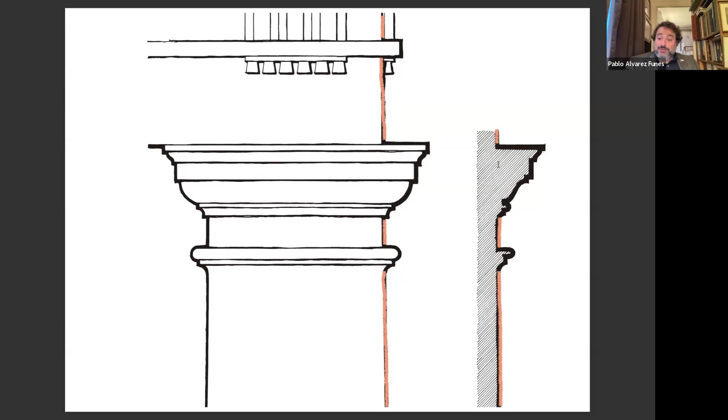That's a must in classical architecture. It happens in Gothic, it happens in every type of architecture. The neck, which is the diameter just below the capital, is the element sustaining most of the weight, transmitting the weight to the ground, and therefore everything needs to be aligned with it. There is only one notable exception where you can skip this idea, and we're going to see it.

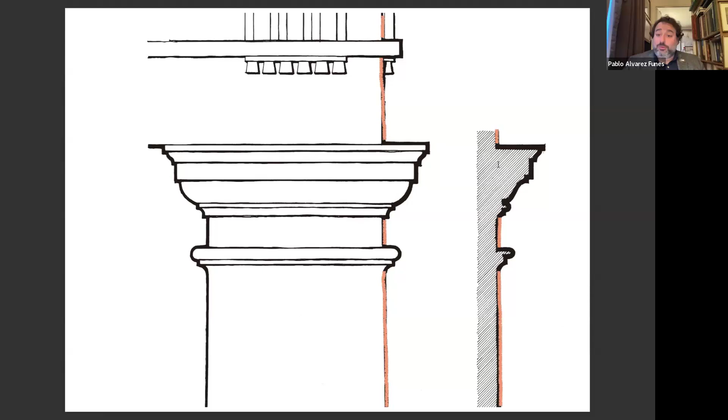On that regard, you can very clearly see two examples of moldings of two different porticos, and you can clearly see that the one on the right has been nicely done, aligned with everything that needs to be aligned, while the one to the left has something odd. If you don't see anything odd, I am telling you that this is not the way you do things in classical architecture, nor in traditional architecture by extension.

This is not a matter of my preference, or a Western preference, or 'that's what the classical say, the Gothic do something else.' No. All the loads are transmitted to the pillar, and then if necessary we have cantilever elements, we have brackets, we have things, but the slab doesn't project outside the lines of the upper necks.

You can see very clearly that while the structure on the right looks light, despite being bigger, despite being a much bigger entablature, the structure on the left looks heavy and clumsy. This is because of the wrong placement of the entablature.

Together with that comes the position of the pediment itself. So it's not only the entablature, the pediment needs to be well aligned. Last week we saw some of the rules, and we can repeat them later on with the books that you should check for all these.

The main one is the American Vignola, which, as I have said many times, is probably not the best book, but it has become the standard in teaching classical architecture because it's the one that the ICAA uses and that Notre Dame uses. It's a good book. There are others that are good as well. At the end of the day, with classical architecture, you cannot stick with a single source. So I would say the American Vignola is your good source to start with, and then later on we move to something else, to the proper Vignola, which would be your next source, or to others.

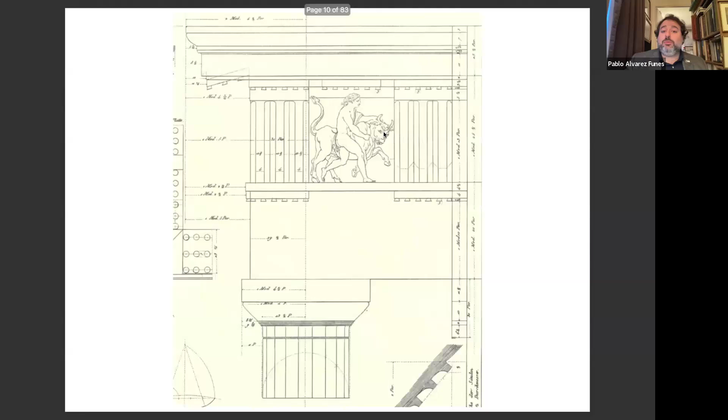In the Greek orders, the triglyph is put in the corner of the frieze. We know that the sequence between triglyphs and metopes means that the metope has to be a square. You can see here in more detail: we need to have metopes, the space between the triglyphs, which have to be squared, creating a rhythm, a sequence.

Once you translate the sequence into the separation of the columns, we might start to have some problems, especially if you want to have the triglyph on the corner.

Why do the Greeks have the triglyph on the corner? We talked about that last week, and I recommend you go back to that video—I think it's published already on YouTube, or if not you'll get access to the server where we're storing them until the channel is fully functioning. The reason the Greeks put the triglyph in the corner is because that's where you'd normally put the rafter if you're building a timber building, and we know the Doric order is derived directly from timber structure.

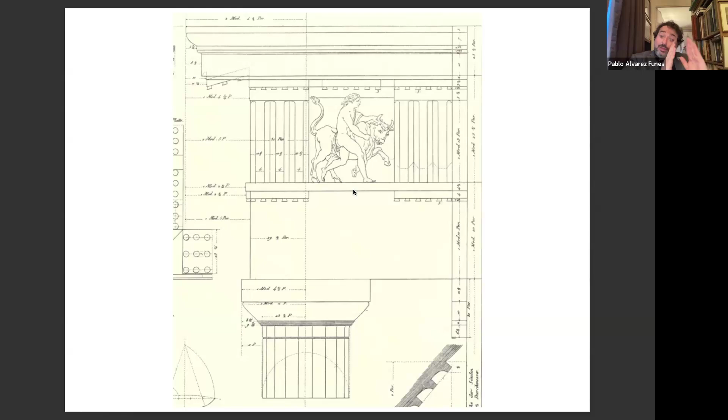That creates a sequence in the Doric order that is more powerful than any other element. You may have heard, and we'll talk about it in a moment, about the intercolumniation and its different names. In the Greek order, we have several issues when positioning the triglyph on the corner that are solved in different ways.

You can have wider metopes on one side, wider metopes on two sides, a narrower column space in the corner, or a wider triglyph. Ideally you shouldn't have any of them, and you should compose so that all the columns inside the portico are aligned with the triglyphs above. That's not going to comply with any of the rules of separation between columns, but that's the key, or the magic if you want to call it, of the Doric order.

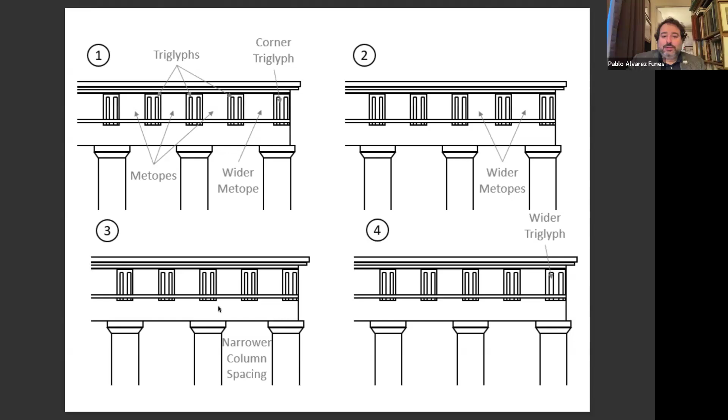As a reminder, here is the difference between the Greek Doric and the Roman Doric. You can clearly see that the Greek Doric has its triglyphs in the corner, while the Roman Doric has the triglyph aligned perfectly with the axis of the column. That's a very key point to bear in mind when doing the orders.

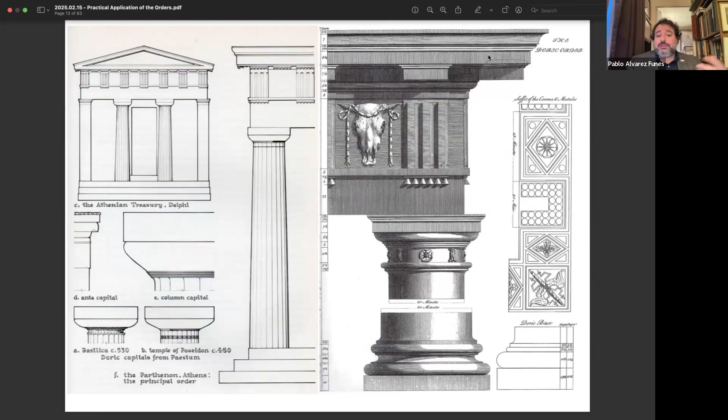So that's a bit of the idea. Here, you may have heard about the intercolumniation—we're going to see a bit more. This is what happens when you have your triglyphs: you may get odd dimensions, like here it's two and a quarter of the diameter, five diameters and a quarter, things that normally don't happen in the other orders. But in the Doric order, the intercolumniation is defined by the triglyph.

If you don't want your intercolumniation defined by the triglyph, don't use triglyphs. Use Tuscan, or use Ionic, or use a Doric without triglyph, which I would never recommend—so go for a Tuscan.

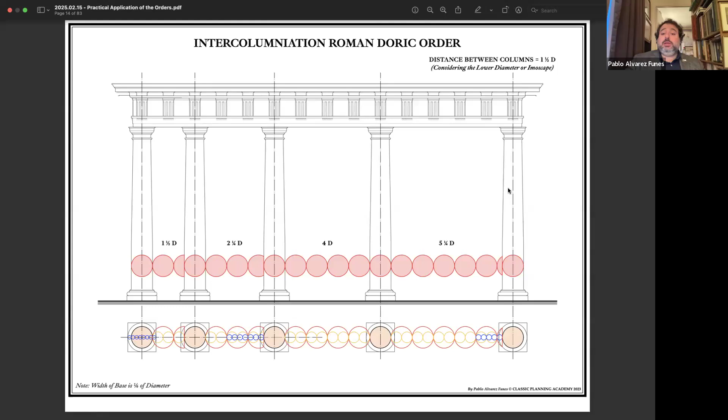Now, the triglyph and the column always have to be aligned. You cannot have a column below a metope. The column always sits so that the triglyph sits on a column, but no column sits on a metope. If it sits on the metope, it is badly designed, or there has been a problem in the alignment and positioning of the elements.

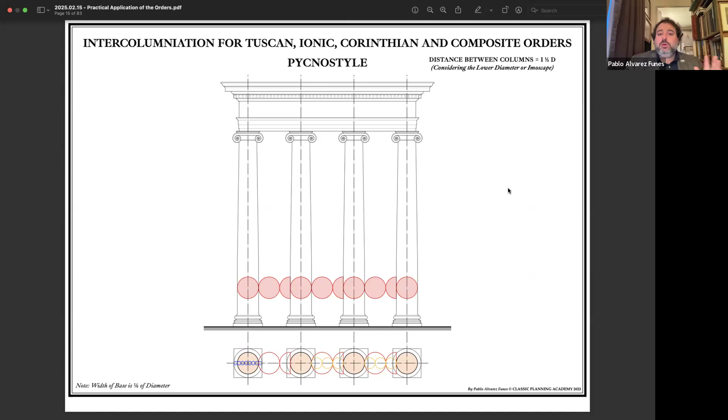This is a reminder for those of you who haven't heard about the different intercolumniation for the orders, as defined by Vitruvius. You have the pycnostyle, which is 1 diameter and a half; the systyle, which is 2 diameters; the diastyle, 3 diameters; and the aerostyle, 4 diameters. Then there's something more balanced in between, the eustyle, meaning 3 diameters in the center and 2 diameters and a quarter on the side columns.

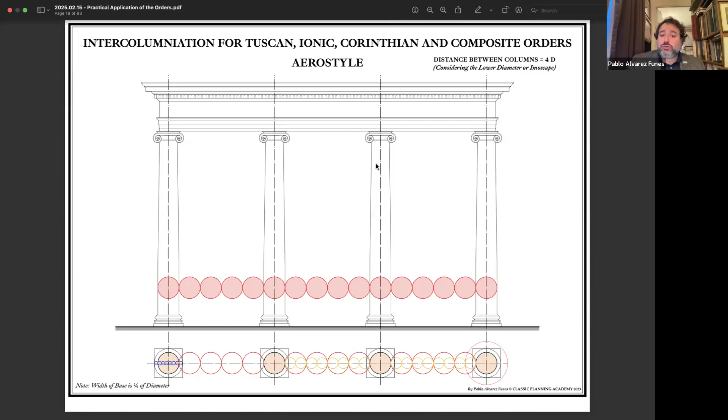From there, you can have different distributions, different positioning. They don't have to match the Vitruvian canon, but you need to ensure that either all the columns in your portico are evenly positioned, or the opening in the center is wider than the openings on the side. If you have 3 and 2, that's still okay.

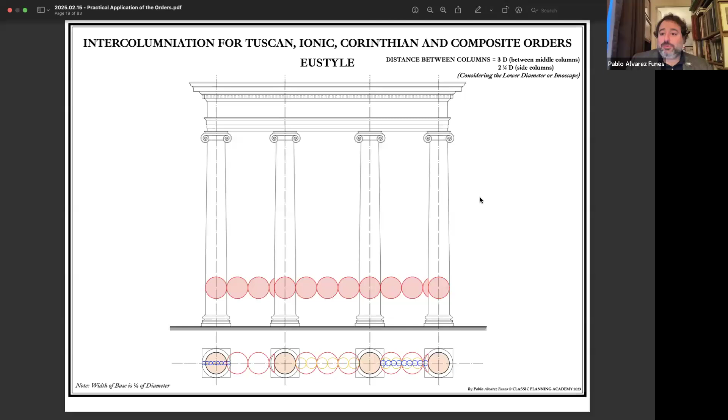Next, we're going to talk about the Ionic order, and you can very clearly see that this is a Greek Ionic order. This building in the United States, I think the National Treasury in Washington, is literally an emulation, a copy of the Ionic order in the Erechtheion in Greece. The main difference between the two orders—we'll see some Ionic capitals in a moment—is that the volute in the Greek Ionic order does this gentle curve, called the cushion, while in the Roman Ionic you don't have it.

Another thing that appears in the Ionic order, which we didn't notice much in the Doric, is the antae. You may know what a pilaster is—the projection of the column onto the wall. With a Doric column that's easy, you just project the column. But with the Ionic, because the volute is difficult to carve and has a lot of complexity when moving in three dimensions, the Greeks created the antae. The antae is just the projection of the Ionic capital onto the wall, eliminating the volutes. You can clearly see the correspondence between the moldings in one and the other.

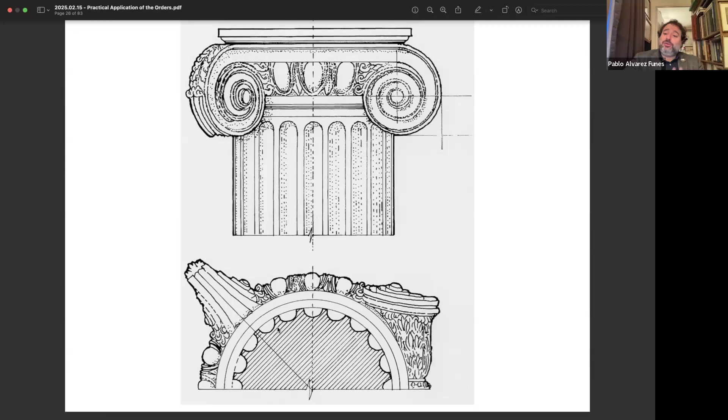This is basically what happens in plan on the Temple of Portunus. We have a volute which is parallel to the wall behind, and then another volute at 45 degrees. Only when you look in very detail do you realize it's slightly skewed, but not always, not from every point of view. In most viewpoints, it looks parallel. This visual trick is what solves the problem of the ionic volute in a corner.

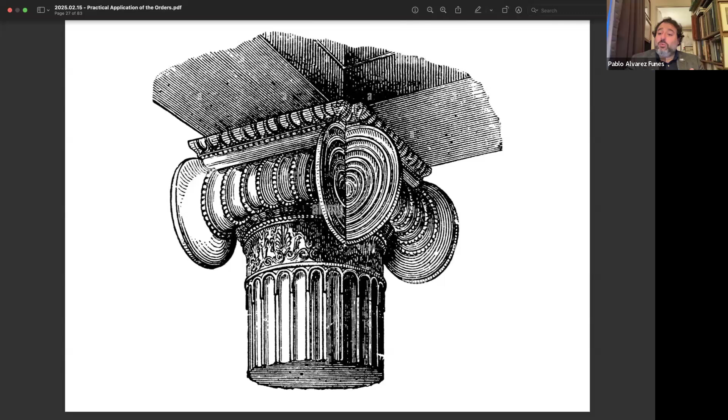However, on the inside, you find this. Some architects also tried to rotate the volute at 45 degrees, but it doesn't look as nice on the inside as on the outside. Why? Because on the outside you are combining two planes of volutes, while on the inside you are combining two planes of scrolls. So the only way of making it work is by putting the scrolls at 45 degrees. This is a very clumsy detail, but it happens anyway, and it's the only geometrical way of having everything work at the same time. It happens in the Erechtheion, which means this is a problem they faced very early in antiquity, and that was the only way they found to solve it.

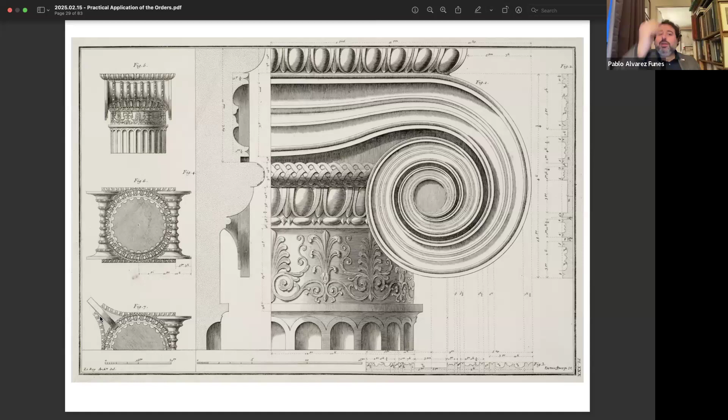You can also see here in the Erechtheion, obviously the photograph is taken in the corner, and you can very clearly see the volute in the corner, but if you look at the other one on the other side, it almost looks parallel. So it's a very good visual trick. You can also see here how the volute works in the corner. Unfortunately, this comes again from the Antiquities of Athens, which is what made the Greek Ionic look fashionable, especially in England and later in the rest of Europe. But you can see very clearly that the volute has a sort of elegant fitting, and both of them connect, and with the nice curve of the cushion, it looks very nice.

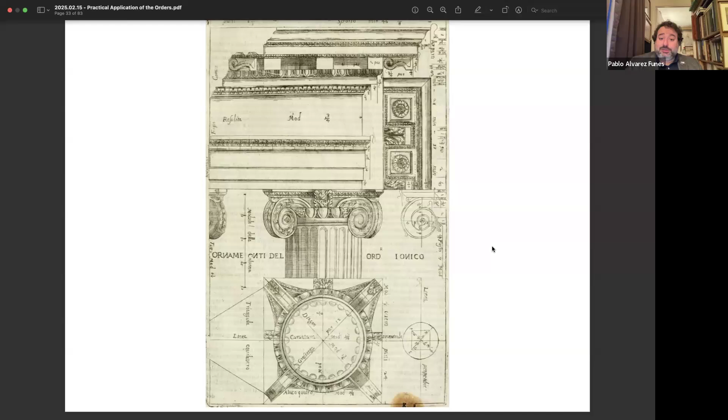Coming back to the Scamozzi capital, you can clearly see this solves the problem very nicely: in what direction does the volute look? Does it look to the front? To the side? It doesn't matter—with Scamozzi, the volute looks in all 4 directions and looks everywhere. Therefore it's not looking anywhere in particular, and it solves the problem masterfully.

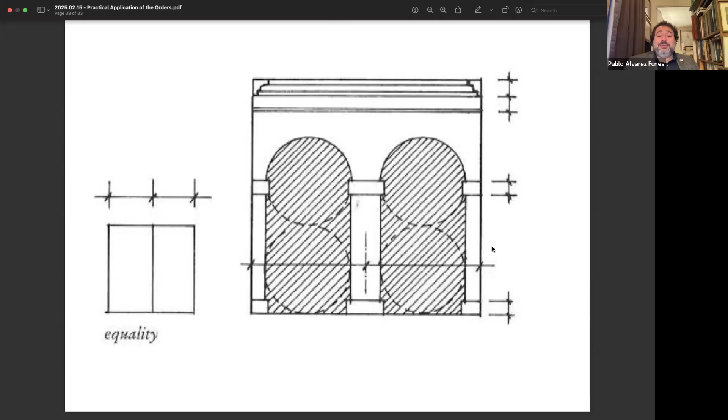That's equality. It doesn't mean only repetition, doesn't only mean exactly equal, but also relationship between those equal parts. We could say that some parts are more equal than others, but all equalities are related.

The next one is differentiation. I would call this more an attribute of proportion than a type of proportion. And why is it an attribute? Because it differentiates the big from the little, the important from the less important, and so on.

This is a clear example of differentiation. We have the big opening differentiating from the little opening, the panel differentiating the painted area, and so on. Now, where do you put the point on the differentiation?

We are going to see. You get it with numerical relationships, or if you want to go more contemporary ways of doing it, you can obtain it with the golden ratio, which a lot of people like doing.

But as we're going to talk about a little bit today, the golden ratio is not a classical way of proportioning. The golden ratio is a wonderful number, but it was not used in antiquity.

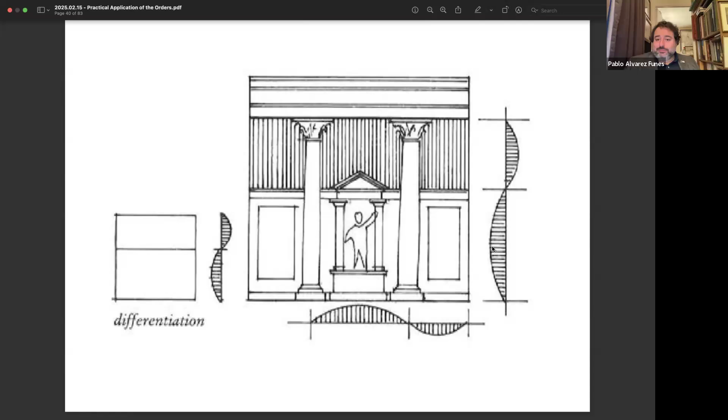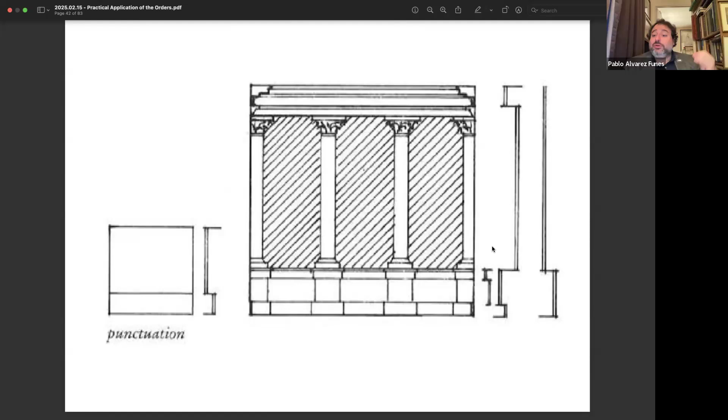Third type of proportion is punctuation. Punctuation is the end of the sentence, where you're putting the final dot, the final coda to your design. That way, the capital is the punctuation of the column, the cornice is the punctuation of the entablature, and so on. The dado is the punctuation of the pedestal, and each of them are punctuating over each other. So that's one of the attributes of proportion: punctuation.

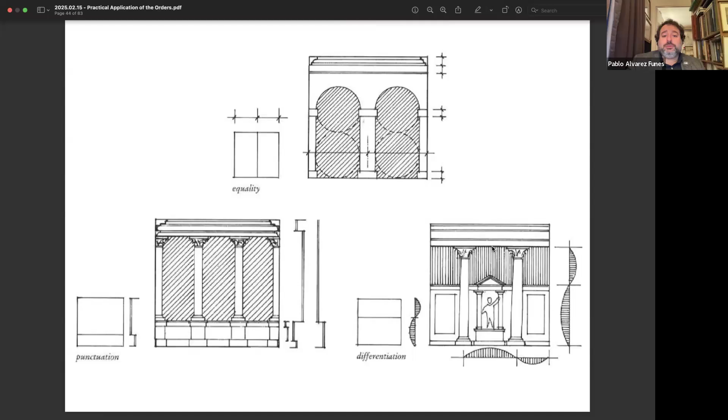You can clearly see there is also a relationship between punctuation and differentiation, because they go together. The punctuation is the transitioning point into two different elements. So if we're differentiating capital column from entablature, my punctuation will be in the capital, but the differentiation is still there. You can see the three of them together—rather than types, they're attributes of proportion. Here you see, in a bigger way, everything related to each other in a diagram done by Richard Sammons, who talks a lot about it. If you go to his lectures on YouTube or any of his books, he will talk extensively about punctuation and differentiation—very interesting in relationship with the different parts of the geometry.

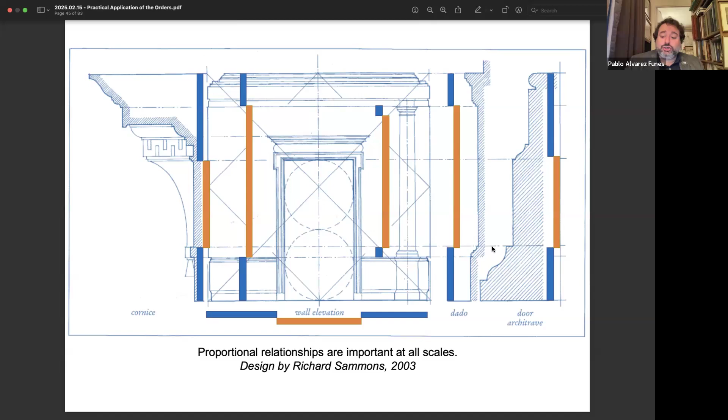There is another one which is called the regional style. Regional style is a proportion of specific culture or context, and this can be in a narrow sense or a wider sense. We have, let's say, non-Western cultures who don't use classical architecture, but still use regional style.

Not so long ago I was on a round table discussing with other Mexican architects about traditional architecture, and we talked about how you find a lot of proportions from Serlio in Mexico—the traditions from Serlio literally flowed to New Spain. But then we also talked about how do we understand the proportions from the Aztecs, the proportions from the Mayans, because we don't know. The only way of knowing it is by doing the same thing people in the Renaissance did: you measure the building and find a relationship. But that relationship isn't sacred geometry, isn't the golden ratio—it's a number, an entire number related to something in its mythology. As simple as that.

Then you have personal style, which is the proportion specific to a very specific architect. That's why, for example, we've just seen the Scamozzi capital—this is a proportion related to Scamozzi. And that's why you say the Doric order of Palladio, the Doric order of Vignola, the Doric order of Scamozzi, etc. To explain that, I like bringing this example where you can see the totally different ionic orders that you can find.

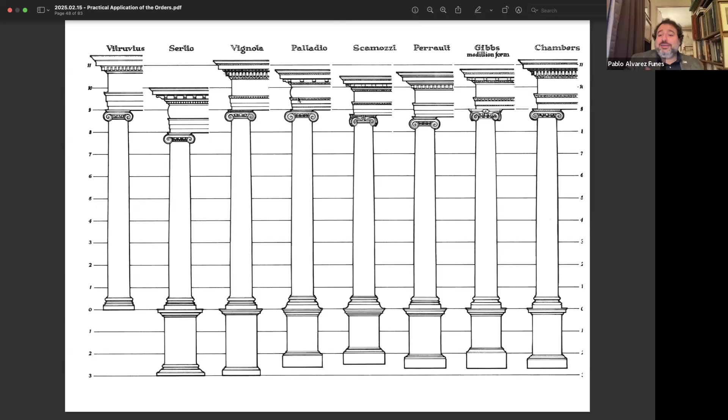In Vitruvius the ionic order is 9 times its diameter, but in Serlio it's 8 times—the ionic order from Serlio looks much more squat than the others. But we have other orders that are even more different. I'm bringing here all the ones you can see in the treatises, but the tallest ionic order you can find is the ionic order of the Temple of Apollo in Didyma, which is almost 11 times its diameter. So it's higher than a composite—it looks like a giraffe when you see it. Looks a bit like it's had a stretch in AutoCAD, but it works and looks nicely proportioned, the same way a giraffe's neck looks very proportioned.

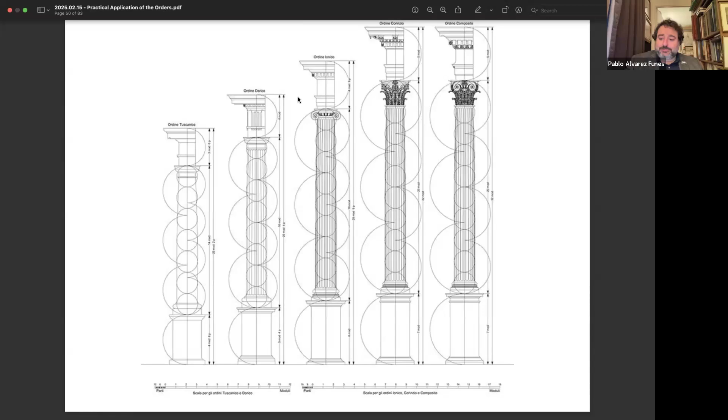All the proportions we've seen, once applied in practical terms, can be divided into arithmetic proportions or geometric proportions. There are other proportions that are purely mathematical, and others we're going to see that I'm calling modern proportions. Arithmetic proportion is the classical way of building an order—you see these schemes a lot, talking about the relationship between the diameters, with everything related to the diameter, always seeing numeric relationships. That's an arithmetic proportion—we're talking about numbers and sequences of numbers. As opposed to that, geometric proportions are the result of geometrical figures, of tracing a figure on the ground. Why is this important? It's important because in many cases, the graphic techniques of antiquity were not very good.

We say, oh, they had parchment, they had papyrus. Yes, they had, but what had been preserved to us were the finest parchments, the finest papyrus. So that means a lot of stuff was done on much lesser quality paper, where details were difficult to draw.

We also need to remember that the concept of numbers as we know now don't appear until the Renaissance in Western Europe. They were invented in India, then the Arabs took them, and then from the Arabs came to the Christians, and they don't become widespread until the beginning of the 16th century. Before that, in the West, to express numerical relationships, you had to use Roman numerals or just write the number in text. Alberti, for example, when he writes the De Re Aedificatoria, says very clearly that he doesn't want any copies, because when he wrote it, the printing press wasn't widespread at all. He said any copy must copy the number as he writes it, not as you would use it with ciphers, because he was scared people would forget the ciphers, the same way people forget Roman numerals, and then all of a sudden you have mistakes in the numbers.

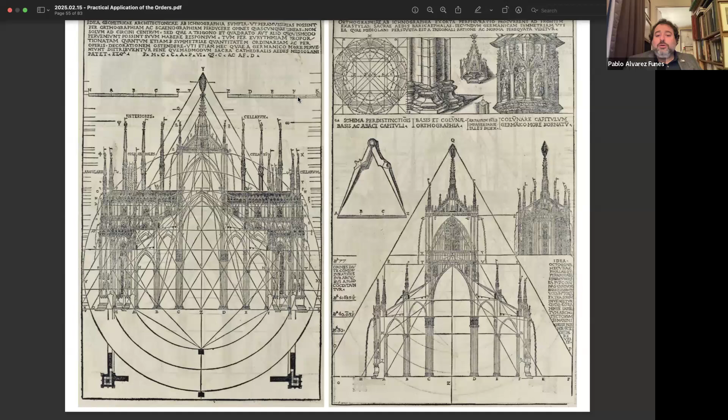Many of you might have seen this image, the section of the Cathedral of Milan. This is from Vitruvius, the translation by Cesare Cesariano in the 1520s. This translation specifically is very relevant because Cesariano is talking here about Gothic architecture and about proportions. A couple of pages before this, he's talking about the Vitruvian Man, and then in his comments he's also discussing how to derive the proportions for a Gothic cathedral, in this case the Cathedral of Milan.

These are the proportions that Serlio lists. When Serlio is talking about geometrical proportions, he's talking about the perfect square, the proportions sesquiquarta, sesquitertia, the proportion diagonal, the proportions sesquialtera, the superbipartiens tertia, and the double square.

Does any of you see here the golden ratio? Good, because there is no golden ratio. Nobody in the Renaissance could see that the golden ratio could have a practical application. Luca Pacioli published the Divina Proporzione, where he talks extensively about that, around 50 years before Serlio publishes his first book. But nowhere does Serlio talk about the golden ratio, about phi, about anything like that. It was Luca Pacioli who would talk about it.

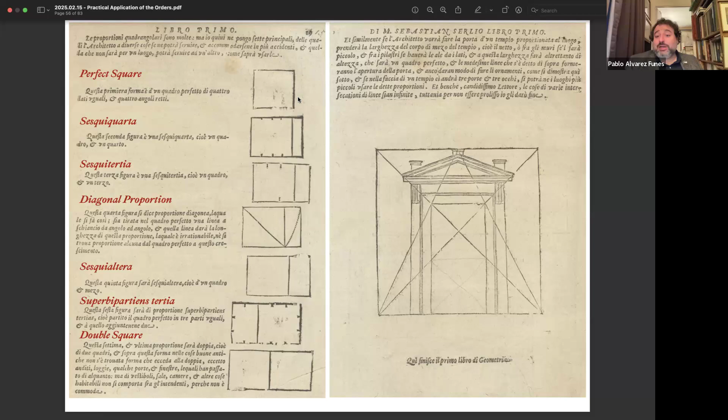Some mathematicians would talk about it, would continue the translation of Euclid, but none of them would use it in architecture. They would go to geometrical relationships, as you can see in the image to the right, and it is true that once you start applying all those geometrical relationships, you start getting some interesting points. Of course, if you start tracing lines one to the other, at some point they will intersect with each other. And also, if we're using relationships that are based on two axes, on dimensions that are repeating on the two axes, and we put them in a controlled environment, they will give you results like this.

Why? Because everything is aligned. When we're talking about entire numbers and perfect proportions, they can be bigger and bigger. So that's why I'm bringing here the point of Serlio, and then another one with the tetrastyle portico, how everything is engaged. If you design the tetrastyle portico in a way that it's almost systile, you get that.

So this is the importance, this is the key point. And why is it also important? Because for craftspeople, it might be easier to do the geometrical way than the arithmetic way. Why? Because you only need to remember one of the intersections, whereas in the arithmetic way, you need to do a lot more numbers and operations.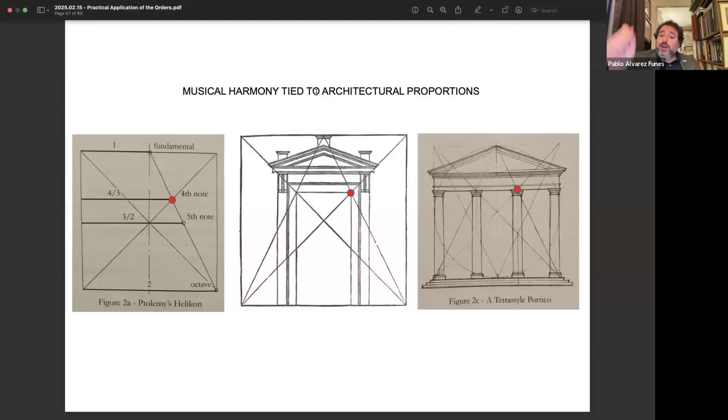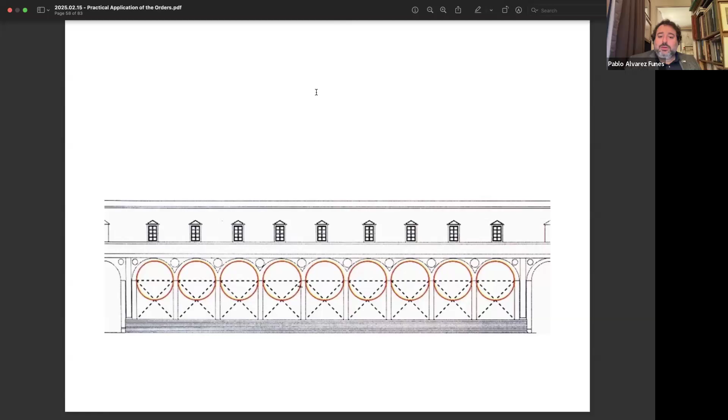You can see here a very beautiful example of what would be the equality of the attributes of proportion, and also the relationship. It's very, very simple, or it can be very complex. You may have seen this drawing a lot, and we're going to see the alternative version of this drawing. I'm bringing this specific one because this was a geometrical analysis done of Santa Maria Novella in Florence

in the 1970s by Franco Borsi, who was a modernist architect. So we're not talking here about any person who can be claimed as not knowing. He knew what he was doing. He knew, because this is something you know a lot, and you always remember: the modernists know a lot about historical architecture. Don't underestimate them on that sense. They know a lot. They know more than you. They know more than me, because you need to know your enemy, and they know the enemy very well.

So never engage in a historical debate with a modernist, because they'll tell you, don't tell me about history, because I did a PhD about Alberti. I did a PhD about Vitruvius. You're not going to tell me anything I don't know. And I tell you that Vitruvius is useless because I have studied it a lot. And they use the argument of authority. So sometimes you cannot argue with them using those arguments.

When we need to go, some people go through the more empiric or empiricist scientific approach with neuroscience, or let's go for more the symbolic approach. You decide the one you want to go. You will always find criticism. So it doesn't matter, you just do what you want. You do what you believe is beautiful. And if you believe that it's beautiful, you do it following the rules that will tell you it's beautiful. But don't engage in wars. You cannot lose. Choose your battles.

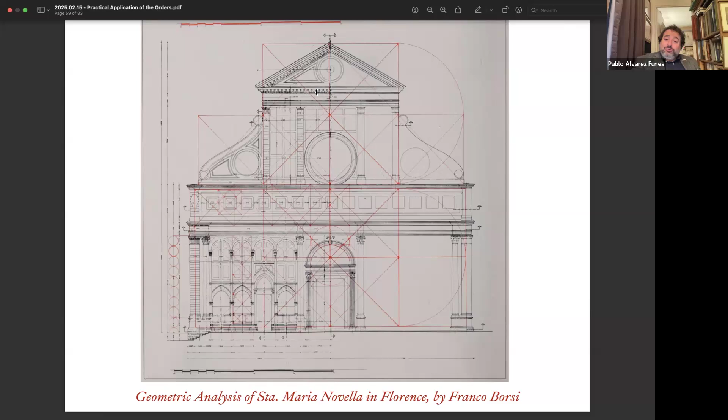If Alberti didn't do this to design the facade, he did something very similar to get onto it. But definitely we know that he didn't use the golden ratio. This is a similar method to determine the points of the Parthenon and the Pantheon.

This is by Blondel, from his courses on architecture at the beginning of the 18th century, and you can see here how he determined certain points. The first element for the Pantheon is that the dome is half a sphere, and the whole sphere can be inscribed into the space, and from there he takes design decisions guided by geometry. So this is a good way of structuring things.

Le Corbusier would call this the tracé régulateur, and he would make it a feature of modern architecture. Well, in reality, these had been used forever.

Le Corbusier was critical because he didn't like the numeric relationships of the orders, being the special person that he was. He hated what he didn't like and liked what he liked. He hated classical architecture because he couldn't understand it. That's basically the reason. There are several studies explaining why he didn't understand, and why he detested, classical architecture. One component comes from the romantic neo-Gothic medievalist environment, but another is more intricate and related to his own mind.

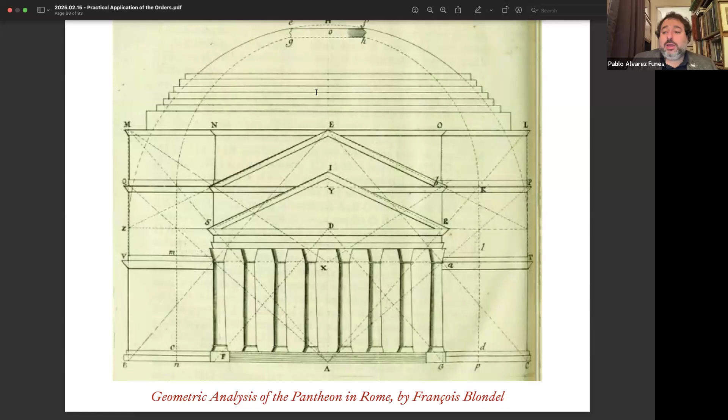A good book about proportion is Beauty, Memory, and Unity by Steve Bass, which I know many of you have already read. I would recommend you take a look at it. It's very good, a very beautiful book about proportion.

Now we're going to talk about other proportions. You see these a lot, and some people love them, but they seem ancestral and have been used everywhere, when in fact all of them come from the beginning of the 20th century. The first one is dynamic symmetry. You find this a lot. This is an exaggeration of geometrical proportions.

Dynamic symmetry holds that instead of having simple geometrical relationships, everything is related by square roots, one or the other, and by diagonals that then create square roots. This was proposed by this gentleman, J. Hambidge, in the United States, who was then joined by a Norwegian who made more noise, and then by a Romanian politician with a lot of time to spend in London.

Then obviously Le Corbusier saw all these guys and saw the heavens open, because he found that his architecture—though he knew very well it wasn't related to what he was doing—he made his architecture work according to the theories of these guys and not classical theory. That's why he saw his architecture as superior, as a symbol of the times.

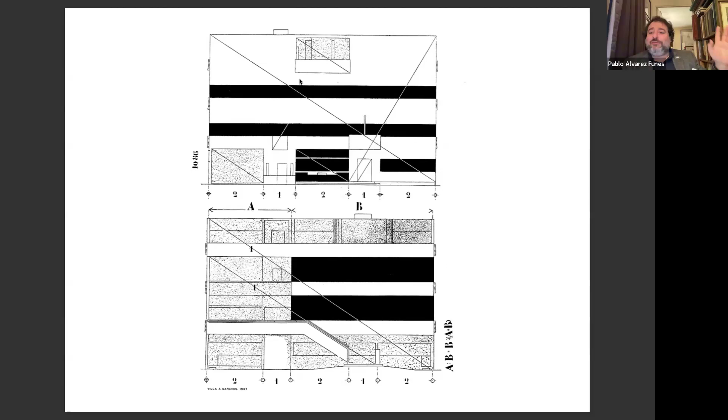They were not worth it, they could be used as a historical anecdote. They could be better demolished because they don't have any interest, etc. And they could be replaced by these wonderful geometries that he would later convert into the Modulor. And from the Modulor we go to the book that all architects know, Ernst Neufert's The Art of Projecting Architecture. I don't know what is the art and what is the architecture in that book, but it's very useful for every architect.

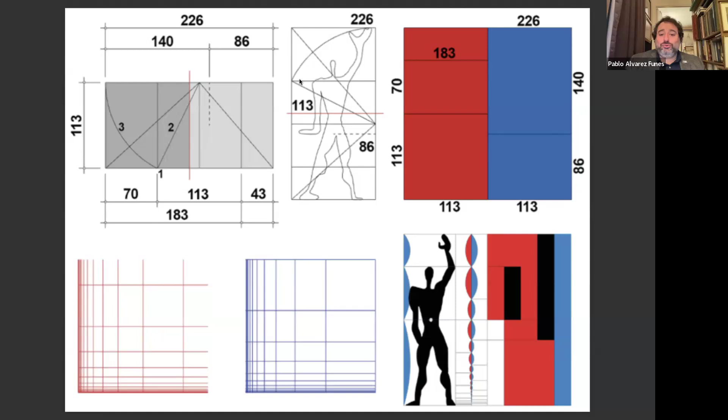So you need to be very careful when you see this stuff. You need to understand where it comes from. Then you can do whatever you want. But you need to understand that these things that are supposed to come from the ancients, they are not so ancient. They're the age of your parents, grandparents, or great-grandparents, in the case of the golden ratio.

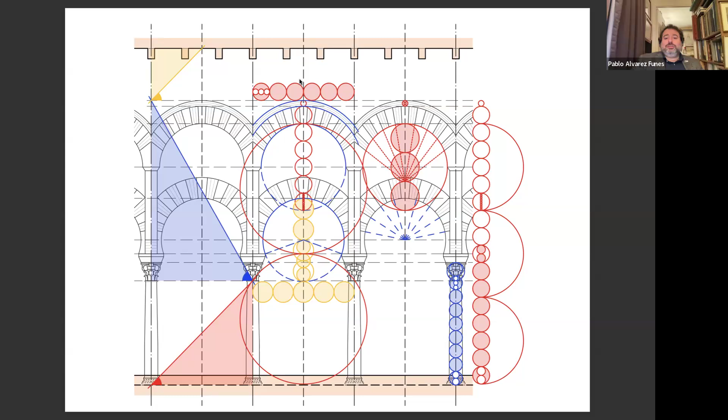It's a book in Spanish, never translated into English, but very interesting. And as a conclusion, the golden ratio was not used in the past. Period. We cannot demonstrate that it was used in the past. We don't have any source mentioning that. Historically, all the proportions in classical architecture are arithmetic and geometric. You can place as much beautiful spirals as you want in a building, and if you scale them good enough, and draw them with the right thickness, they will be there.

Thank God, I mean, we especially, coming back to this round table, I was talking about architecture, pre-Columbian architecture in Mexico.

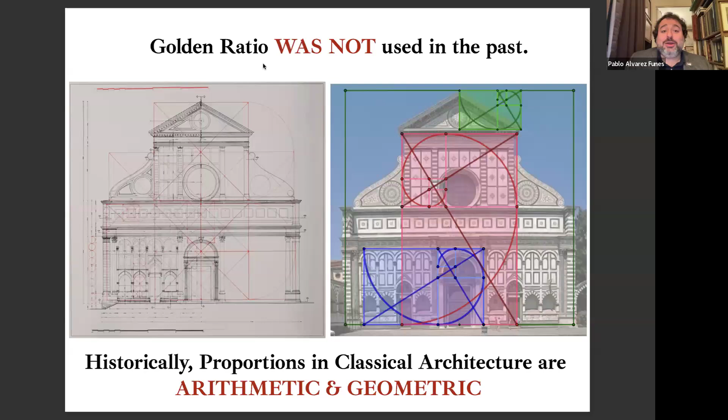You mentioned that we didn't have golden proportions in the past, but then it's mostly a modern tool for architects. When I'm working with Dr. Bruce, he uses this golden proportion. I'm just asking that when he does it, he puts the golden proportions there, and I'm confused about how it matches so properly with the golden ratio. It doesn't match because it was used in the past - it matches because you put the golden ratio there, and then you proportion based on the golden ratio, not because it was used historically. If you put your golden ratio, then you adapt your Vignola - remember what I was mentioning about the Vignola order - that's how you do it. I wouldn't recommend it, but that's the way a lot of people choose to work. It's a very valid way. I have had colleagues who do that at work, and obviously it does generate proportion - I'm not saying it is not a way of proportioning.

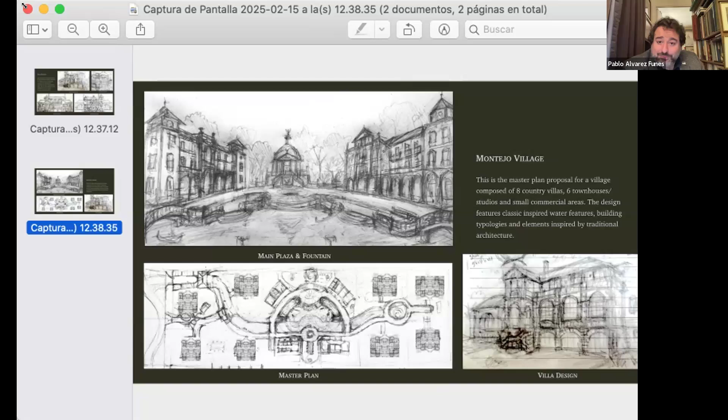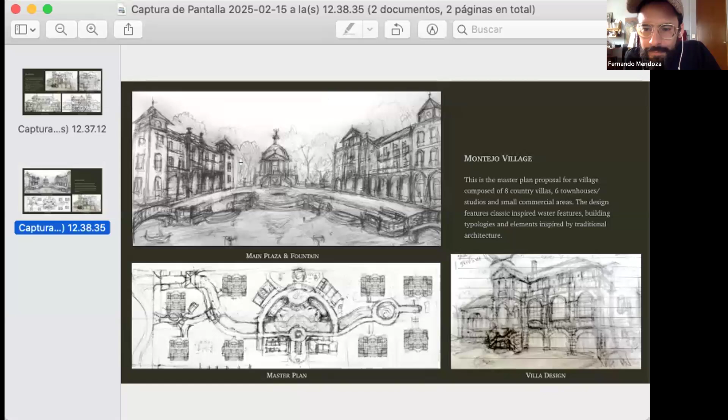Okay, what do we have here? So this is a counter proposal for a project. And it's basically like a master plan with 8 villas.

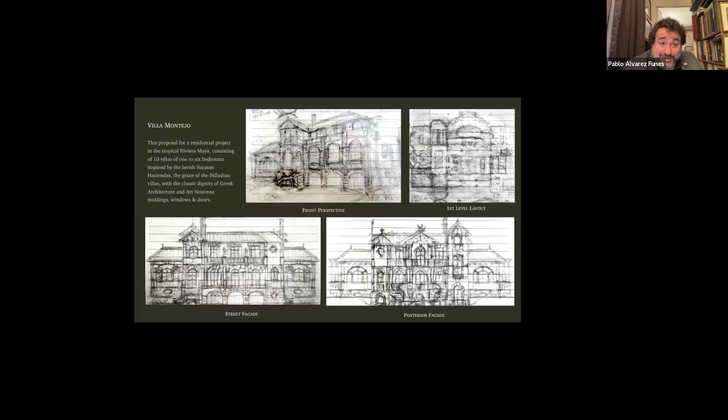Okay, so I thought it would be interesting to apply some of the classic concepts that we've been mentioning into this villa design.

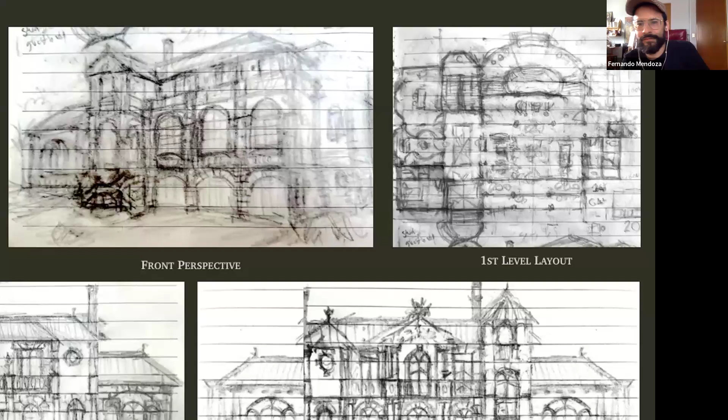So here is the first layout, and this is the living room and the dining room. And then I kind of wanted to have it be symmetrical and be open for possible modifications. Okay, so these are the circulation elements.

This is the front axis. And if the people want more rooms, it can be added on this side, like as you see here.

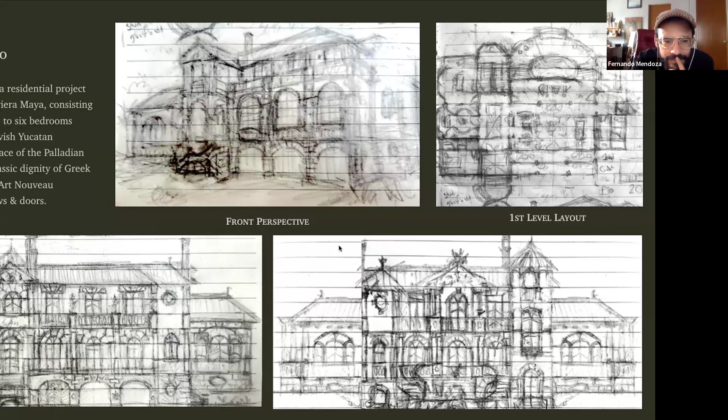So in the front elevation, is this one, and this is the back elevation. Okay, so what are your comments?

I think the first element that I see here is we have a very big living space. This is like a terrace, no?

Yes, I think the one that you selected is both the terrace and the living room. This is the actual living room, and these are the columns to go outside to the terrace here. This is the back terrace, which you can see here. Okay, I'm just trying to understand the plan.

Then we have a massive, very beautiful staircase here as you enter. Very good. Then we have, these are 2 bedrooms, no?

Where? I see one bedroom here. One, and this one, yes, these are 2 rooms. This can be a guest bedroom, and this is supposed to be a kitchen. So I see, what is this?

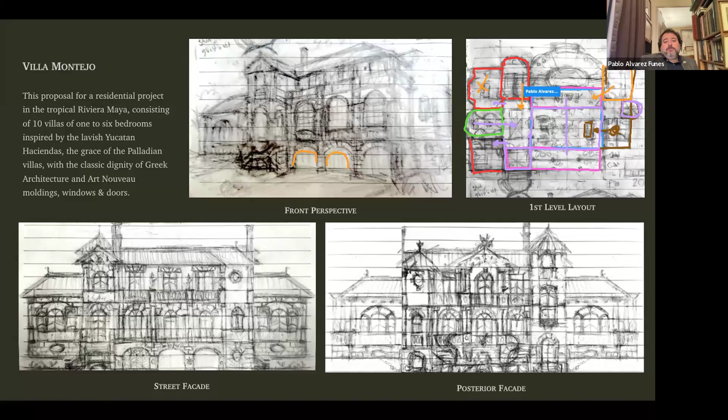Now, coming back to the elevations. I can see here you have the garage, the entrance to the garage. So I guess there will be a connection from the garage to this staircase so that you end up somewhere here when you are coming in. Yes, both stairs. Yeah, that's good. So I like that you have done the rusticated ground floor.

What I'm not sure, from this sketch, is which style do you want to go for with this? Because the whole thing is not fully symmetrical. It has what you call local symmetries, where elements are symmetrical by themselves and then compose an overall symmetry, since you have this balance of the two wings, but it's very nice that it's not fully symmetrical.

The reason is that when you're composing buildings, as we'll see in the next two classes on elevations, you can be either very, very formal, going for a Georgian terrace house, Palladian scheme, double symmetry, super strict, or a bit more picturesque, which allows for a more flexible plan. In this case, you've gone for something more picturesque, which means we cannot go for full high neoclassical, it would be too rigid for the situation.

It's like talking about dressing. This is a smart casual situation. If you tell me you're going to a smart casual gathering and you say, Pablo, I want to come with a tuxedo, I'd say no, a tuxedo is too much. But if you ask, can I come with a bow tie? I'd say you'll look perfect with a bow tie. Can I come with a tie? Yes, you can come with a tie. The bow tie and the tie will be the maximum - the bow tie is most formal, the tie one level less formal, but probably no one is coming with a tie, so you don't need to if you don't want to.

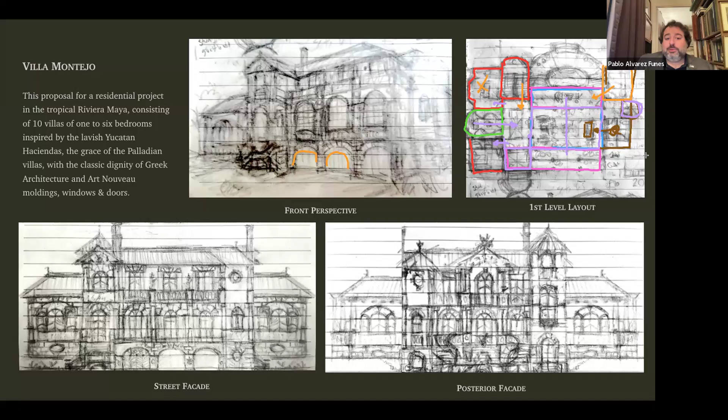So there will be elements - let's say this gallery, this entrance with a beautiful gallery. You can compose this as a typical neoclassical feature with your column, your pedestal, your balustrade, all the elements. You will need to ensure an entablature here, which is missing, and then on top you have more pedestals.

But then the cornice of the overall building doesn't have to be the cornice of the order above - it can be the cornice of an imaginary giant order, and this cornice will give you much more presence than a tiny, puny cornice in there.

Also, you've used the rustication for the ground, and I can see very big, powerful rusticated elements. Do you want to take the rustication to the upper floors or just keep it on the ground? Just keep it on the ground.

I think here I was just doing how the pieces would be if they were made with cast cement or something like cast stone.

I also did something with the posterior facade here where I divided all the columns and bases. Do you think what you're missing here - you can do it, it looks very nice, but it misses the whole entablature. You have put pedestal, column, pedestal and column, you need an entablature to divide them. The horizontal line you've shown - you can do it, but at the same time here it looks like you have a double window, which means you're not going to have anything at all.

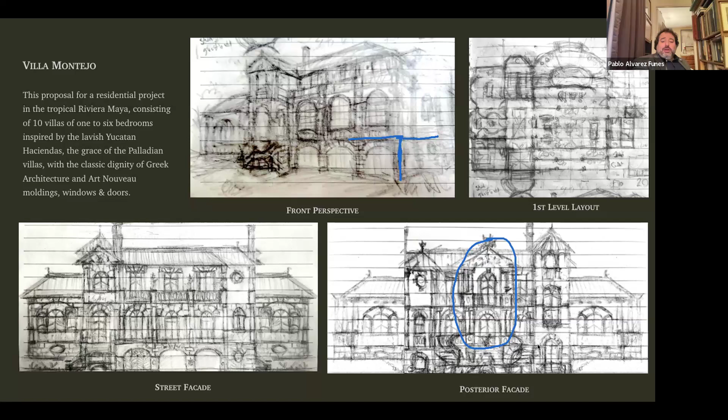But I'd say if you go for a Doric or Tuscan on the ground, or a Doric without triglyphs - I know I said at the beginning don't go for triglyph, but go for a Doric without triglyphs.

And then on top, I wouldn't have an Ionic, because the Ionic is like you're having fun at a party and then the nerdy guy comes with all his facts and things like that. So the Ionic would be like the party pooper nerdy coming in. Oh yeah, you're making fun about this, but actually...

I think this house is more for a relaxed Tuscan and a pretty Corinthian. So it's a house to have fun, it's not a serious house.

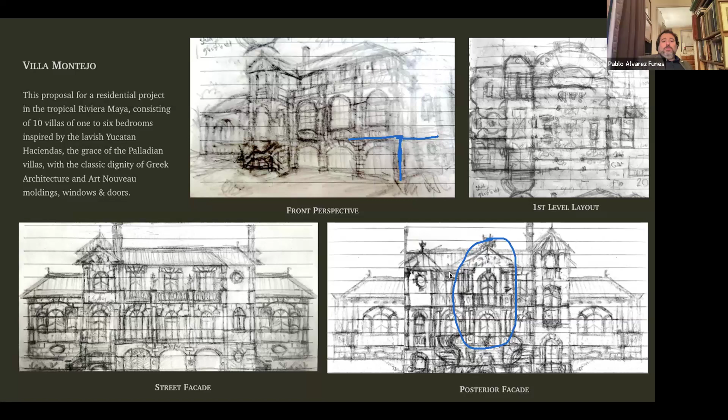If you had chosen another scheme, I would say no, you go for a beautiful Ionic arcade overlooking this. But I think the moment you've gone for more volumes and higgledy-piggledy, the architectural approach in terms of classical language has to be higgledy-piggledy as well.

You need to have fun. It's a bit like when kids go open their parents' wardrobe and put all the clothes on at the same time - especially the girls, they put the high heel and the dress and the hat and the foulard, or the boys put the shirt and the tie and, instead of putting the blazer, they just put a normal jacket and the shoes. So it's something like that - not putting all the clothes you have at the same time.

Why? Because we're having fun. So when you go eclectic, you need to go for more fun. You can't be - that's why it's like having the nerdy guy come into the party. You make a joke about something, and then he says, no, actually this didn't happen like this, it happened like that.

Or imagine, if you say this famous phrase 'let them eat cake' when you want to be nasty with someone - 'let them eat cake' - and then someone says, actually Marie Antoinette never said let them eat cake, it was Madame de Montespan who said it. Come on, you're ruining the whole thing.

That's a bit what I mean - especially with an eclectic approach, you need to be eclectic in that way.

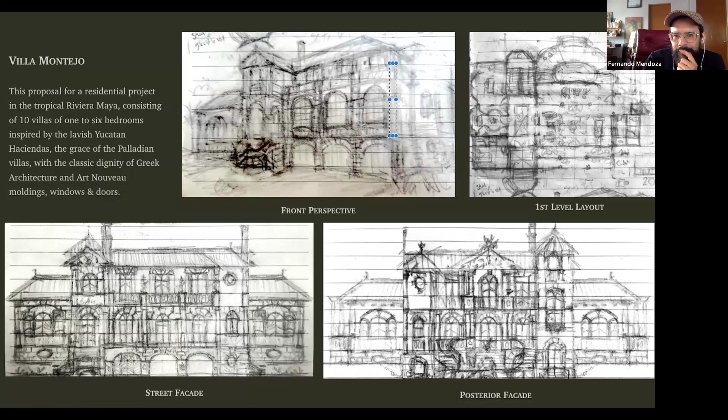And the other element you suggested that went through all the height - can you tell me a little more about that? Imagine you have a full column with its cornice, frieze, and all your elements here - this is a standard order.

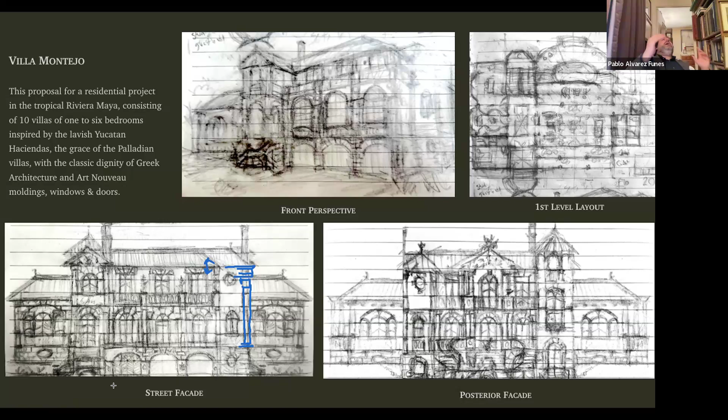So you obviously need to leave more space for the cornices, and this is something I say a lot to everyone. Remember, when you are doing these designs, we as architects think we want to have as much light as possible inside the interior. Your client will come and want the windows all the way up, sometimes even touching the slab. And then you forget that on the inside, you need to leave space for the cornice, the window architrave, and the curtain pelmet.

And gosh, the curtain pelmet is very big. And if you tell me, I don't want curtain pelmets because it's for old ladies, I want a curtain bar - the curtain bar is very big too. So bear in mind that you need to leave a considerable amount of space.

I don't like using metric dimensions because it might not be enough, but I'd say minimum 40 to 50 centimeters between the window head and the bottom of your slab, because you will need at least 10 to 15 centimeters for your architrave, depending on the width of your window, if you don't want it to look ridiculous. And the cornice needs to be at least 20 centimeters to look consistent. Otherwise, you need to go for a different type of cornice that is very ornate and very expensive - expensive because the cheap ones look horrible, so you need the good quality ones. Whereas if you go for a thick running molding but allow for a bigger space, you can go for a cheaper molding.

So bear all those things in mind, because in the worst scenario, you risk the interior designer coming to you and telling the client, look, the architect hasn't designed the windows properly, I want them lower down. And then your client says, oh, you didn't think about it, you have to lower the windows. And now your beautiful composition is done, and you need to lower the windows. That's a pain.

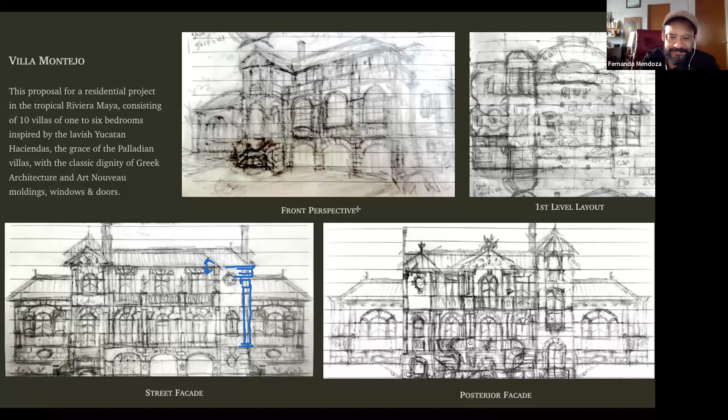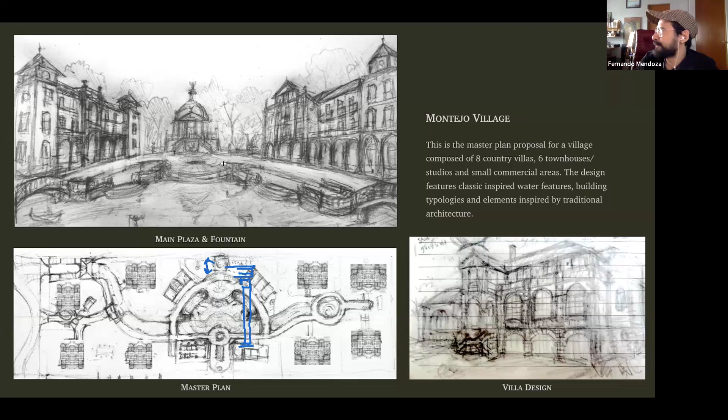You want to show anything else, or was it just these two? Well, this was just a general master plan, and my idea was to have a higher density in the center with a park and a small chapel. And I don't know if you have any comments on this elevation.

Okay, I think it works. I think what you need to try to bear in mind, which is what I'm seeing here, is that here you have a cul-de-sac. You see here? Oh yes, this is just the circulation that ends with the roundabout - this is just the access.

Yeah, what I don't know is if there's any way you can manage to create a sort of... I don't know, obviously this is going to totally destroy your design, and I'm not going to tell you to do it, but I'm thinking - go for it - you do the design in such a way that you enter from this way, and then turn around this way. Even still you can keep these two, this is perfect. But you see here, you are creating a circulation - it's not just one direction.

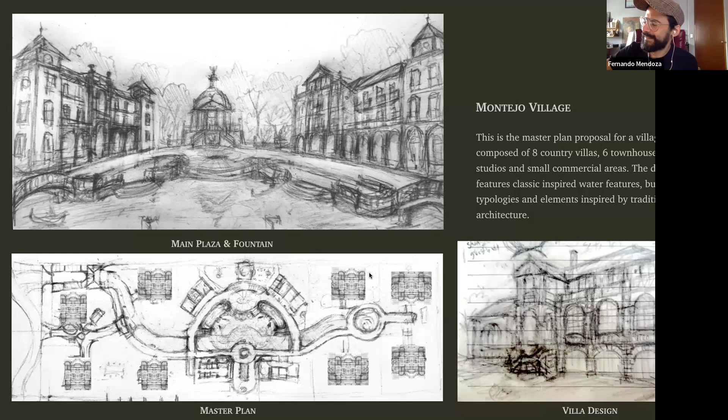Thank you. Perfect. So we have some people who have stayed until the end, and yeah, the people have been saying goodbye. And well, I mean, if you don't have any more questions...

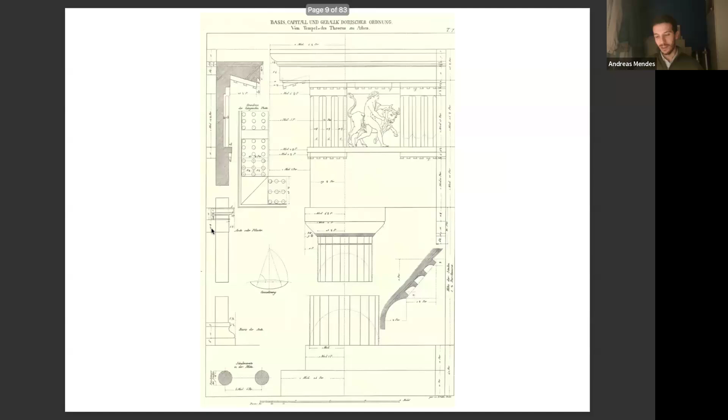I have a question, actually. Of course, yes. Okay, first of all, thank you for the lecture, very interesting as always. And you showed us an image, a facade with a human figure in front, or just juxtaposed.

And I found it interesting because you talked about the symbolic relation... which one? This one? Yeah, this one. You talked about the symbolic relation that has been lost today.

And I wanted to know a bit more about this, or if you have some book or source about this symbol, this information. Recently, the people from the IBAT are publishing a very good magazine called Baluarte, which you can obviously very easily read in Portuguese. And there is an article from an architect called Alex Keys where he talks about that.

Okay, how did you write the name? Baluarte. No, the name of the architect. Alexander Keys. Okay. It's Keys, K-E-Y-S, like Keys.

Okay, I mean, he could have been here today. He couldn't join, but he's one of the usuals that come. So if I see him—because I see him a lot, we are friends here in London—if he comes another time, I will tell him, 'Alex, can you please talk about the symbolic component?'

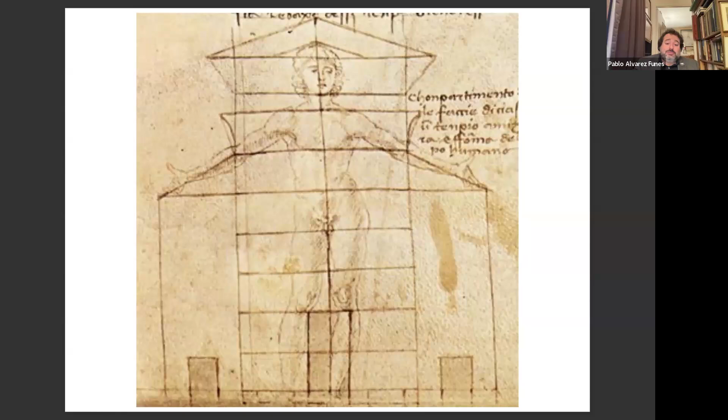Because I have been talking about the human body, but in the Renaissance there was another super interesting debate about the rustic hut—how to integrate classical architecture, or the concept of classical architecture, with Christianity in a pagan context. And they found a way of saying that the primitive hut was actually the first hut that Adam and Eve had to build after being evicted from paradise.

And that appears actually in this manuscript, from this book by Giorgio Martini. One of the miniatures is actually Adam building the primitive hut. So there is a lot of that symbolic transition, that transition from Gothic to Renaissance.

Leonardo Benevolo talks a little bit about that, but it's something where you only get the full picture if you read here, you need to read that. You cannot read a single book, because each book is focused on the author's line of research.

And sometimes, for example, I was discussing this today with another colleague. There's this beautiful one, The Church Building as a Sacred Place by Duncan Stroik. It's very good, very interesting, but it's about church building specifically.

It's not about the whole symbolism. You need to read several editions to get into it. I'd say the Spanish edition of Vitruvius, the 1787 edition by Ortiz y Sanz, if you can read Spanish well, is very good, because you get that perspective. It was translated by a priest, so he incorporates whatever he thinks is necessary, bringing a Christian interpretation wherever needed, and also an archaeological interpretation. So he never gives you a pagan interpretation. It's interesting for that reason.